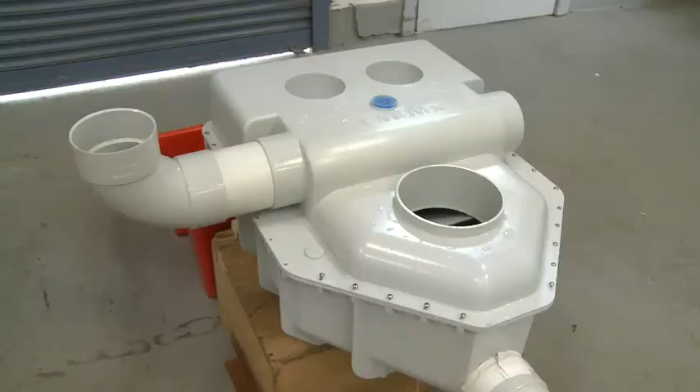The Drainwave is a sewer dosing unit, so it's a tipping bucket inside an enclosed box which takes wastewater from the house and gets it out and through the pipes in a great big rush. The application that we've got here is for absorption trenches, which come off the back of septic tanks.

So what you find is that the water from the house and then the septic tank at the moment with the current designs is trickling out the first couple of holes. But the Drainwave lets 10 litres of water go in a great big rush in about 5 seconds, and that tips the water all the way through the pipes and we get a very even distribution.

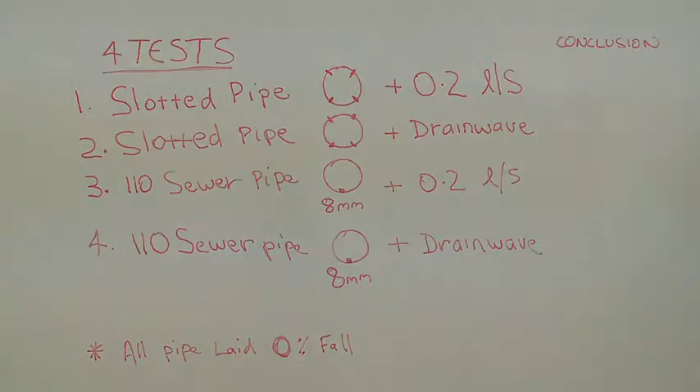We're running 4 tests to look at the difference between slotted pipes and 110 sewer pipes with holes drilled in them, and the difference between 0.2 litres per second and the Drainwave, which doses a 10 litre volume down the pipes. 0.2 litres a second, which is what most taps, washing machines and dishwashers run at. So these would be the normal flow into an absorption bed.

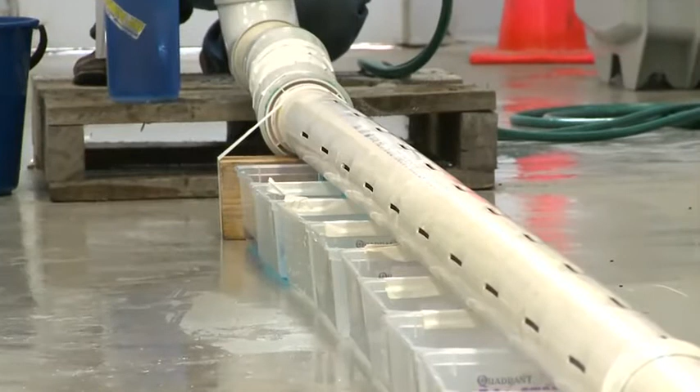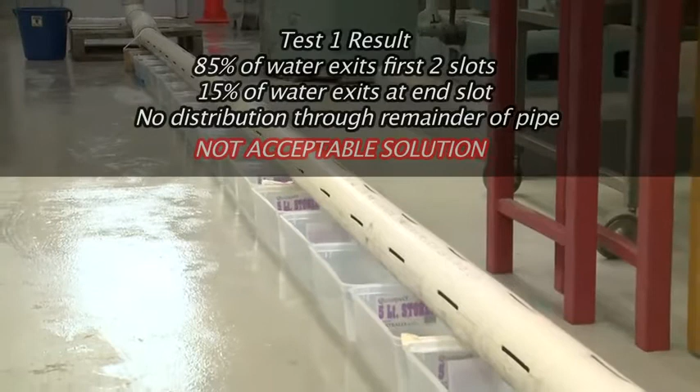Pretty much we got 2/3 of the water in the first 2 buckets and then 1 right at the end. And so there's been no distribution through the middle of it all. That means the beds will be soaked at one end and the other end.

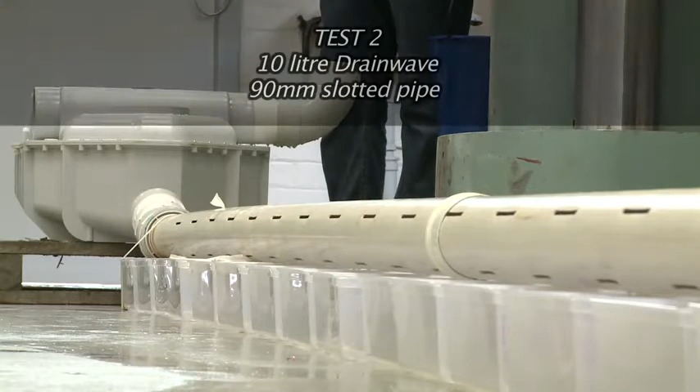We're letting 10 litres of water go in a dose from the Drainwave to see the dispersion when you put a lot more water through all at one time. It's already primed up and there's just about another litre needed to tip it.

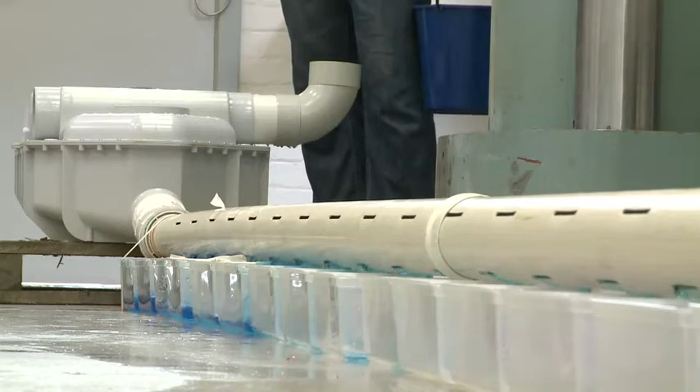So I'd say what we find is that we don't lose it out 3 holes, we do get it over most of them, but it's still not exactly even in that most of it seems to have come in the first one. Test number 3.

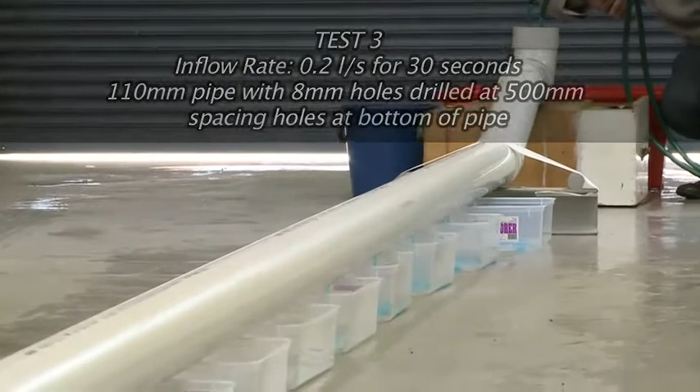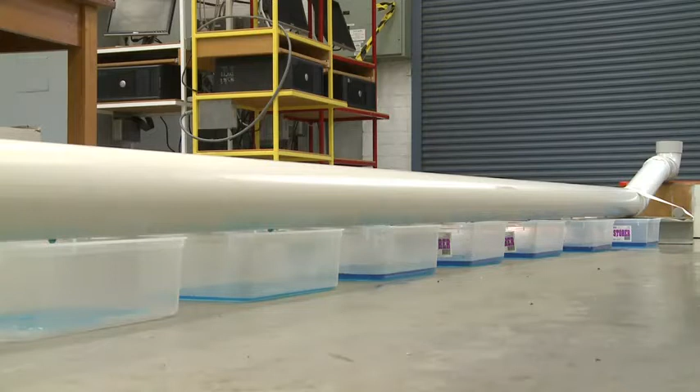We were thinking that it would evenly distribute over the pipe, but it hasn't. It's got to the first holes and leaked out. What that means is there's not enough water going in a surge to get all the way through. So we're going to run the Drainwave next and see what the difference might be. Basically, we think we need a wave right the way through it to push it through all the holes.

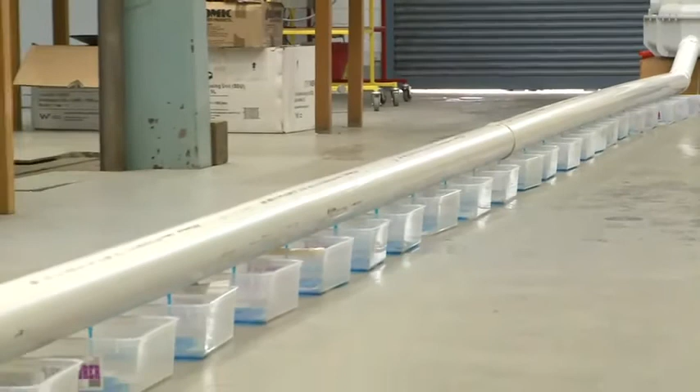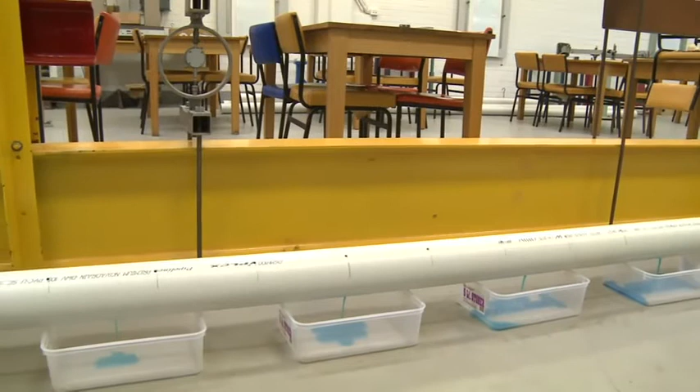All the way. Yeah, that's good. Yep. Does look pretty even actually.

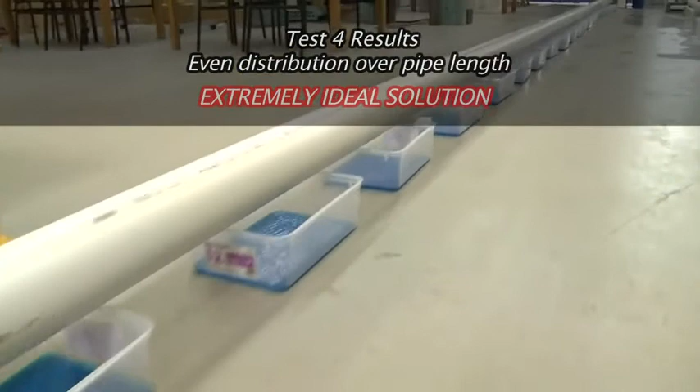The distribution looks to be absolutely even the whole way through. All of the containers seem to have exactly the same amount of water in them, so the distribution's been pretty much perfect. And so we find that we've got a very even distribution of the waste, which is then able to soak into the ground.